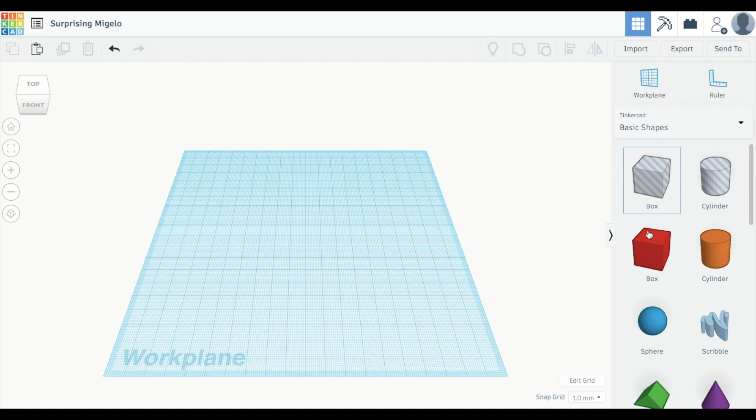Today I'm going to show you how to do a few more basics using Tinkercad beyond the first video that I made. I'm going to pull a box out onto my work plane here, and I'm going to zoom in.

As you can see, if I move it around, it will only go to these grid lines that are on the bottom. If I want to change that, I can make it actually snap to smaller distances. I click on Snap Grid here and change it down to 0.1 millimeters, or if I want to be adventurous, I can make it off. It's probably a good idea to have some sort of snap on here, just so that you can line things up. So I'm going to leave that at 1 for now, but just so you know that that can happen.

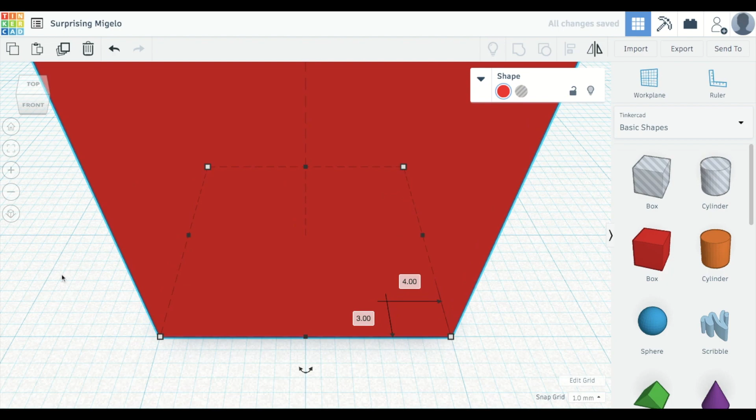There's also, you can see the bigger grids are kind of in sets of 10. So I'm going to place my cube on a set of 10, so it's 2 sets of 10, that's 20 by 20. And I'm going to assume since it's a cube, it is 20 high.

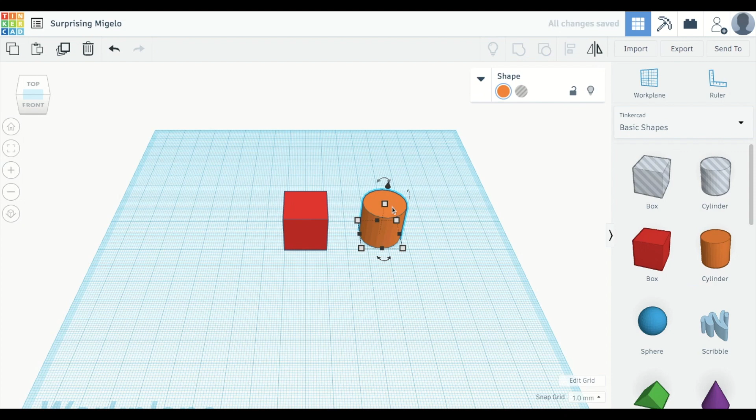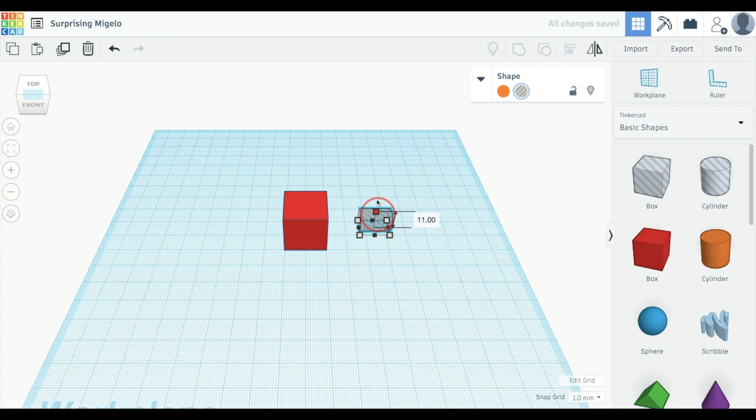The next thing that we can do is we can actually manipulate our shapes by putting holes into them. So what I'm going to do is take a cylinder and change it up here from a solid shape to an empty shape, or to a hole. I'm going to rotate it around so it's 90 degrees. I'm going to make it a bit smaller and less high, and I'm actually going to stretch it out a little bit.

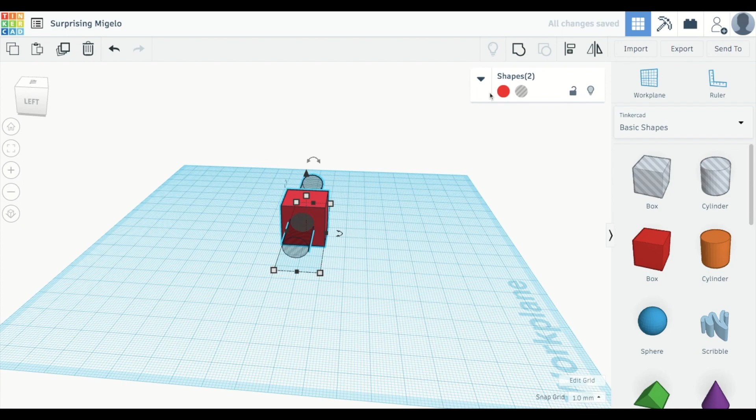When you're making a hole, it doesn't really matter for some things - in this case, it won't. So I want to be able to put this as best as I can in the middle. And all I need to do is select all of the shapes and group them. Now I have, as you can see, a big hole in my cube.

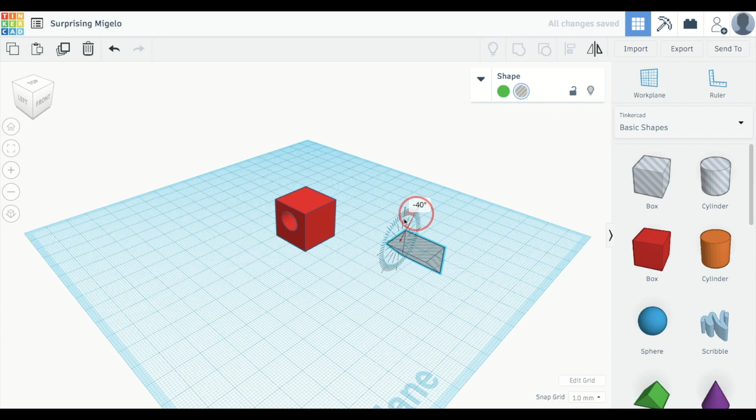I'm going to do that with this triangular prism here as well. I'm going to make it into an empty hole. I'm going to rotate it 40 degrees so that it's flat like that, and I want it to go this way, and I'm going to lift it up a little bit.

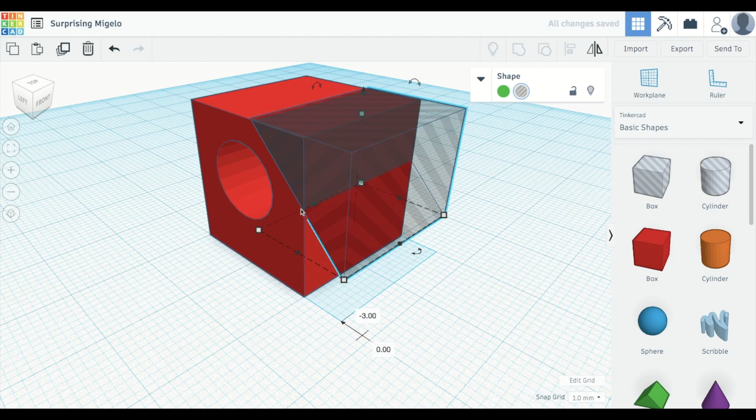And let's see how close I am to where I want it to be - maybe a bit higher. And again, I'm going to stretch this a little bit longer just so that I don't have any weird pieces left over. And the same thing, select everything and group it.

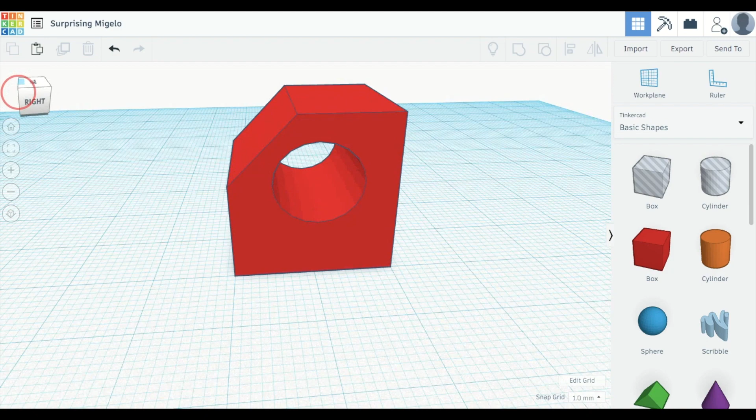And now I have a very funny looking shape out of the cube. If you do this with enough creativity, you can pretty much make anything in Tinkercad. Happy making!